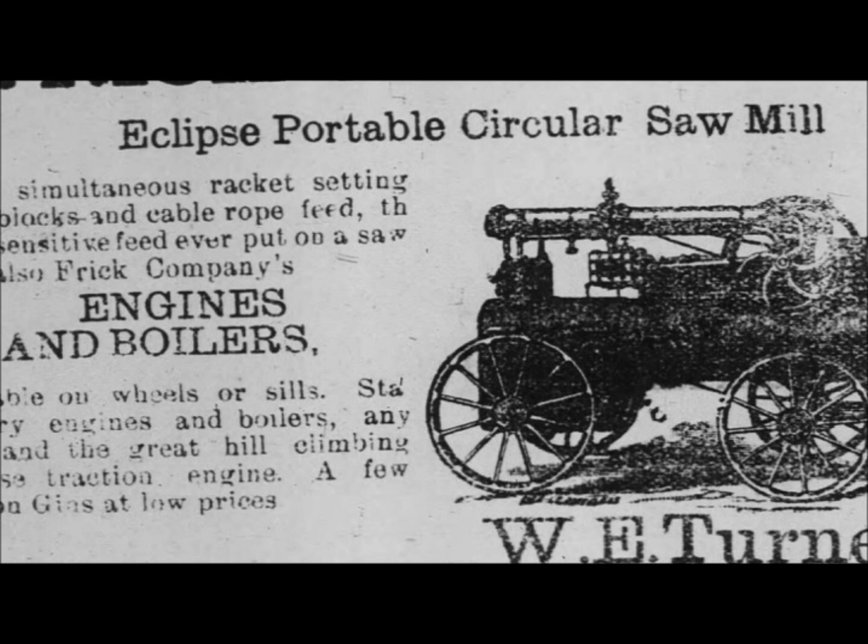His son, after Charles Turner came back from the Spanish-American War, went to work for J.C. Steele's company here in Statesville. He learned how to be a machinist from his father, who learned from his father. He said he also learned a lot from J.C. Steele, from that company. And when he decided to start his own machine shop, the veterans that served with him in the war invested with him to help him get started.

And again, that's talking about the Turner sugarcane evaporators, one of the main machines they were selling. This is 1908 in the Landmark, showing the machine shop after he's relocated down near the depot, near the railroad tracks in Statesville.

This was made by a man named Tobias Ellis, who was from Alexander County. He was a professional photographer.

In 1914, Statesville had an early form of a Chamber of Commerce called the Commercial Club, and they put out two books featuring photographs about Statesville and Iredell County. Ellis did the photography for him, took the photographs, and so this photograph is around 1914.

Now 1905 is when Turner Manufacturing cited that date as the beginning of Turner Manufacturing. So when their equipment would come out for years, it would have 1905 on it somewhere, saying that was when it first began, and that's when Turner started his machine shop.

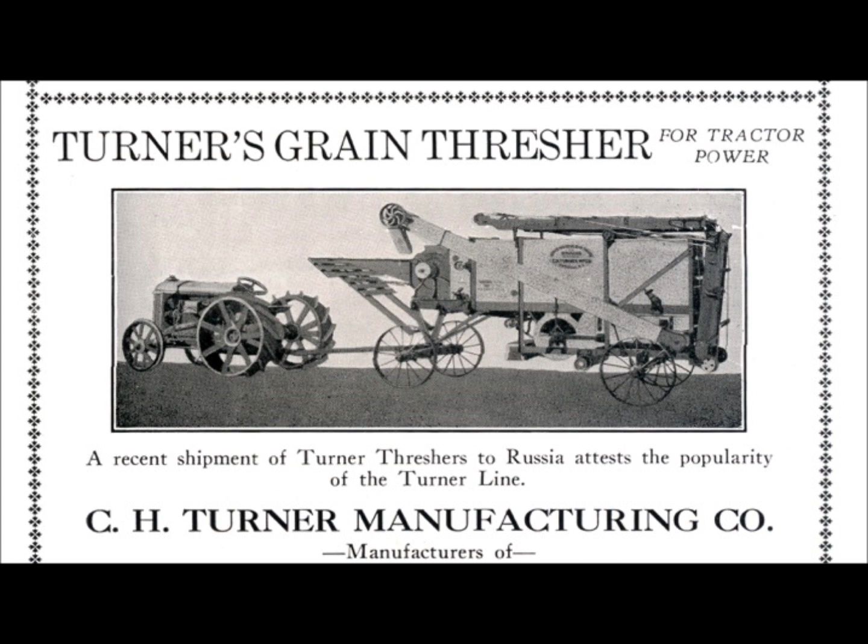And you can see here again, well, this is a later slide, but what happens is in 1928, Henry Ford stops making the Fordson tractor. So here is poor Charles Turner with his entire plant set up to make equipment to go with a Fordson tractor, and now they're not going to make it anymore.

That same year, his father, W.E. Turner, passes away. Then in 1929, the following year, October 24th, 1929, is the stock market crash and the Great Depression begins. So by 1930, he is forced into what is called a receivership. Back then, it's sort of like Chapter 11 bankruptcy now. He had to seek the court's protection while he reorganized his company.

And he does that successfully. By 1934, the paper is talking about how the company is once again going full throttle and doing well. In 1930, he was employing up to 165 people in Statesville in his plants, and that's a lot of people, a lot of workers even for a plant today.

This is from 1941, and this shows a listing of his equipment that he's selling and also the prices that he's selling.

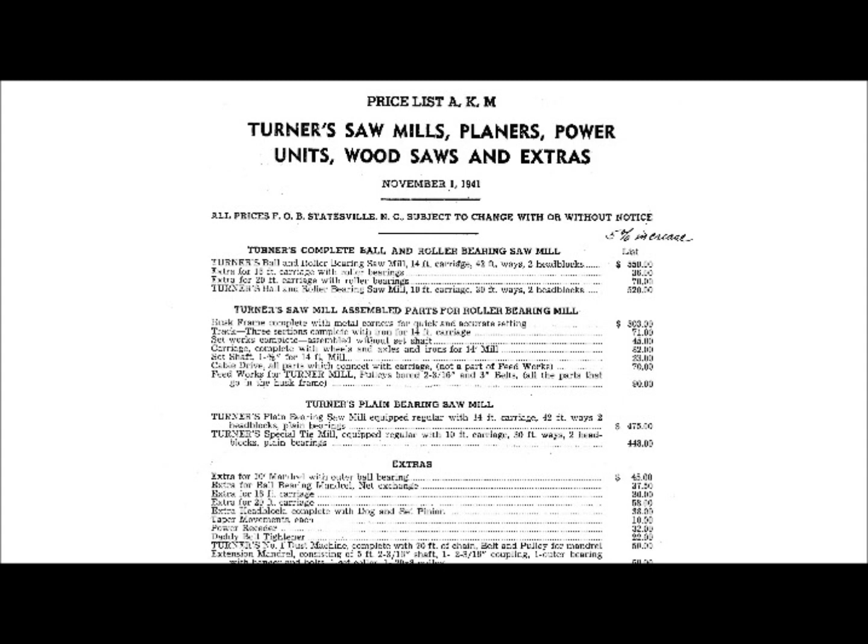Of course, Turner didn't have any heirs, so the company after 1941 falls out of the Turner family name. It's no longer owned by Turners. At this point, Jack M. Wagner is now running the company by 1946.

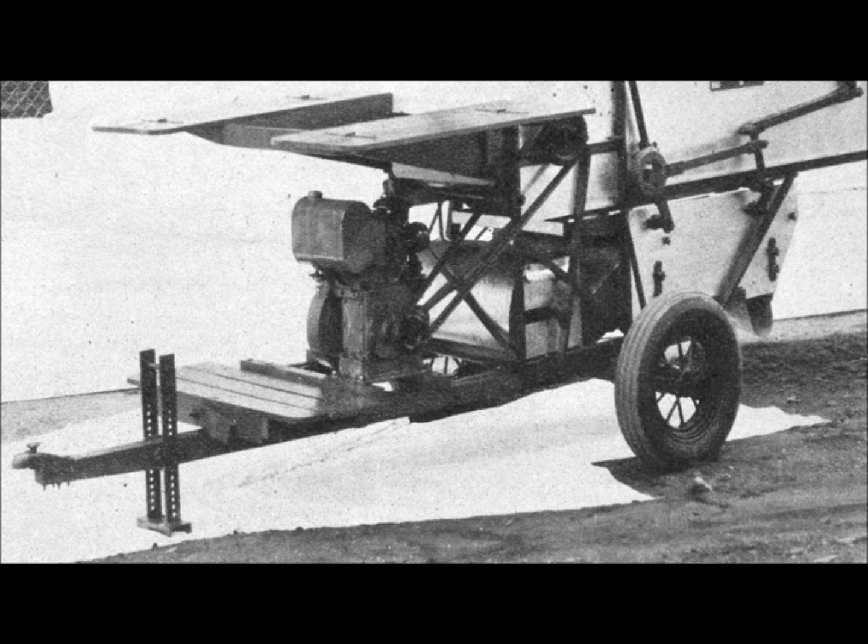And then here in '48, Turner is building an additional plant on Salisbury Road. So the company is doing very well.

The other one was the Imperial Knife Company. They made the blades and sharpened them, while the handle and the rest of the bayonet was made by Turner. They made and sent out thousands of these. You can see they manufactured 298,691 bayonets for the United States military.

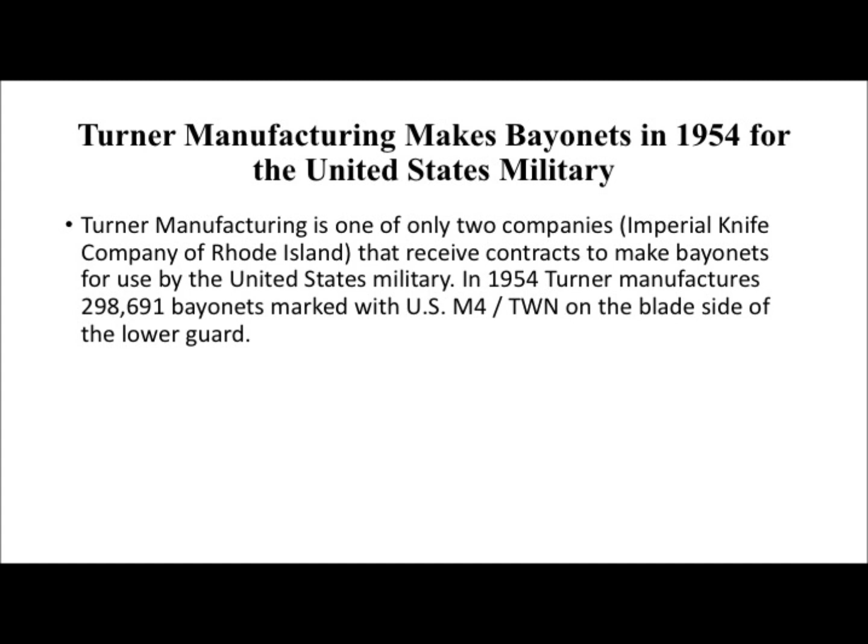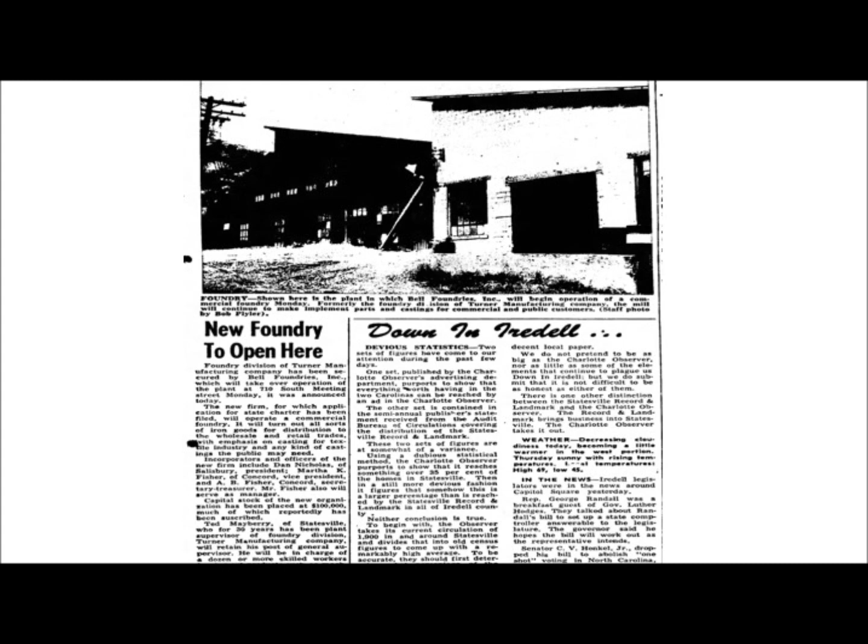In 1955, they have a foundry that C.H. Turner had created. In 1926, he incorporated his company into a corporation, combining the foundry with Turner Manufacturing, so it was all one company. But here in '55, they're selling the foundry to Bell Foundries, and this shows Bell Foundries advertising after taking over the foundry in '55.

In '55, Jack Wagner leaves the company to take over another company, the Tri-State Distributor Incorporation. Then the company goes through a reorganization again, and Turner A. Duncan is the president at this time.

They're pretty confident, and this is really interesting to those of us researching it, because they're going really strong in 1955. They buy the Earthmaster tractor, manufactured in Los Angeles, California. They're moving ahead, bringing the tractors to Statesville.

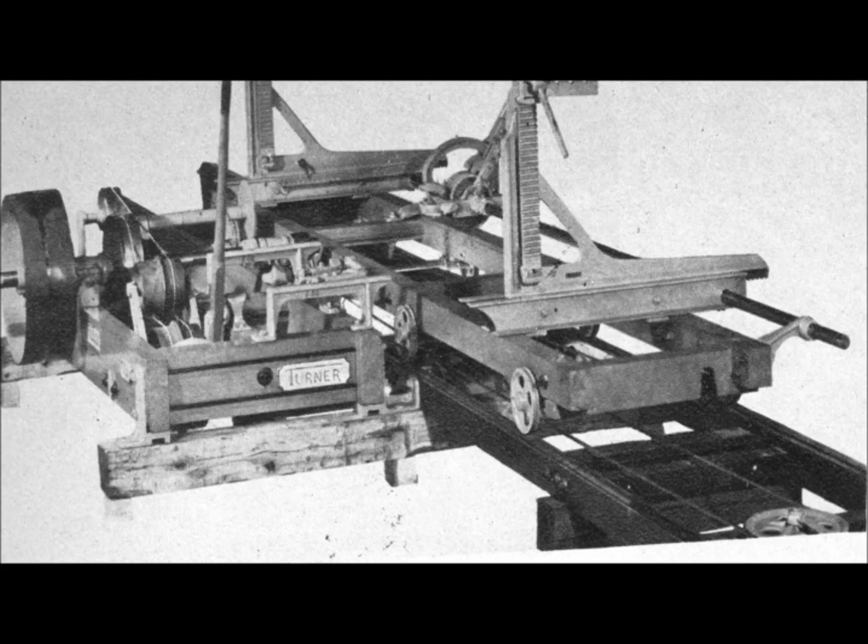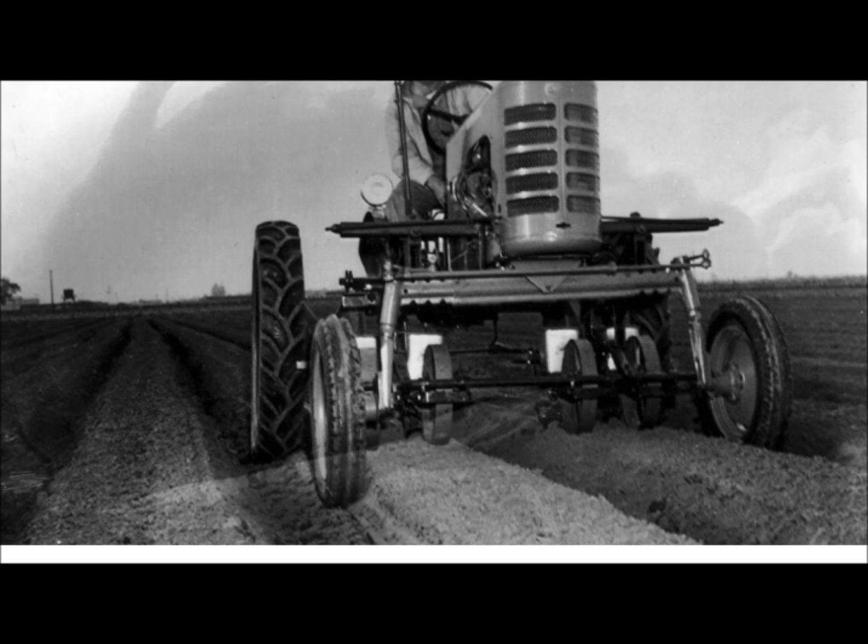Here you see another piece of equipment they're selling, an Earthmaster tractor. They looked at their market as basically the small farm, small acreage farm, and people who did a lot of yard work that would need a tractor. It was designed to be a smaller tractor for a smaller acreage farm.

And there were some beautiful Earthmaster tractors just right outside.

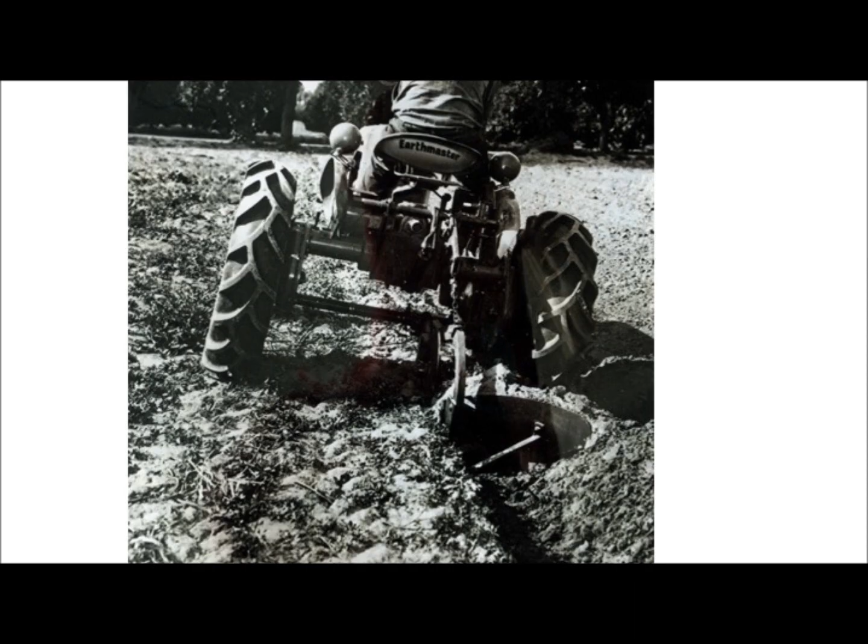Then the company decides to hold a parade in 1955, around December—of course, that's when they do the Christmas parade and the town's decorated. They decided to do a parade of their farm equipment in downtown Statesville.

Here you see an Earthmaster tractor being driven. I believe this is the gentleman who is here tonight—yeah, that drove that tractor in 1955, and he's here tonight. So it must not have rode too rough.

And here is another picture of them. These were taken by Max Tharp for the newspaper here, the Landmark.

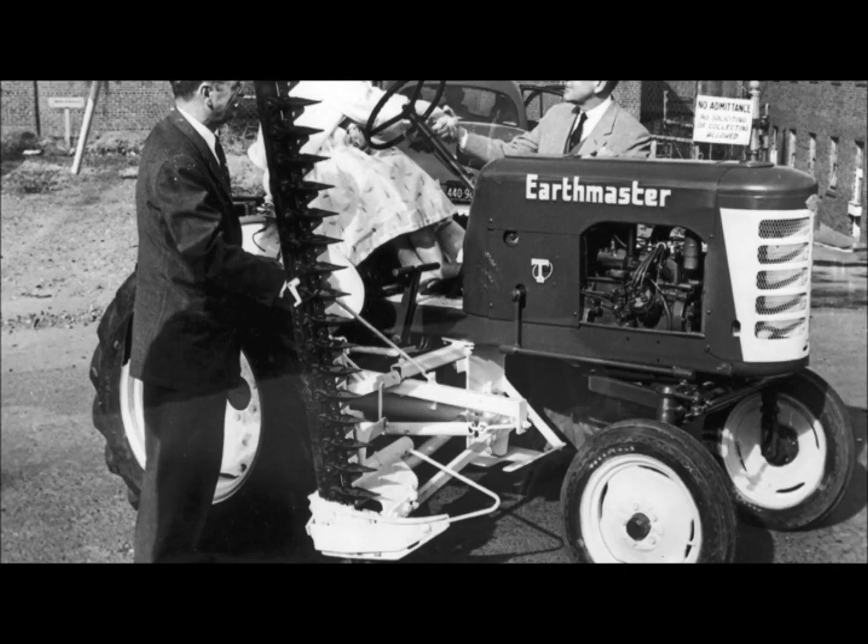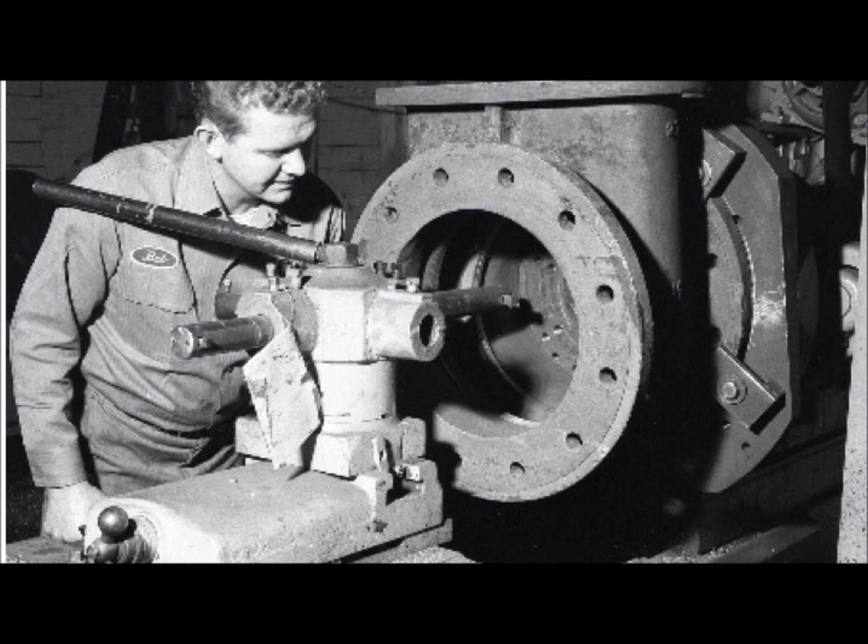They had a lady named Lillian Head who worked in the bayonet department, and they made her the Christmas party queen, so they had her dressed up as a queen to be at the parade for them, and that shows her with the executives.

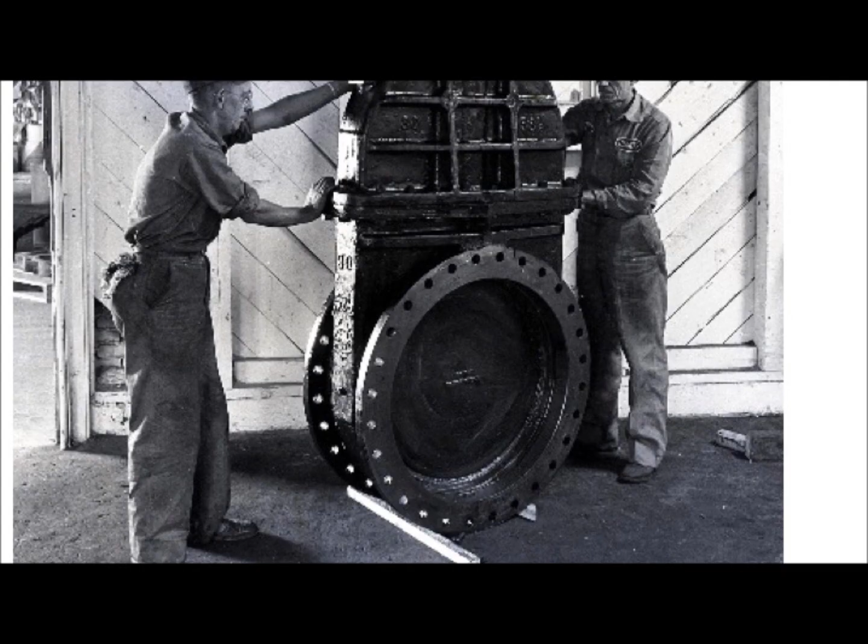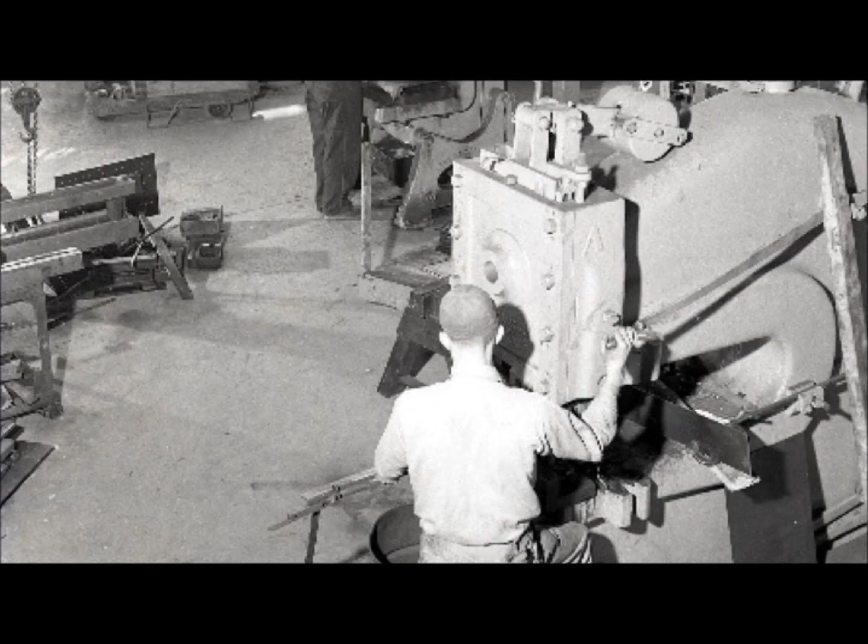But then all of a sudden, the company does a complete turnaround. Something happened between '55 and '56. At one point they're having a parade downtown showing how great they're doing, and then suddenly in '56, by September, they are basically going out of business.

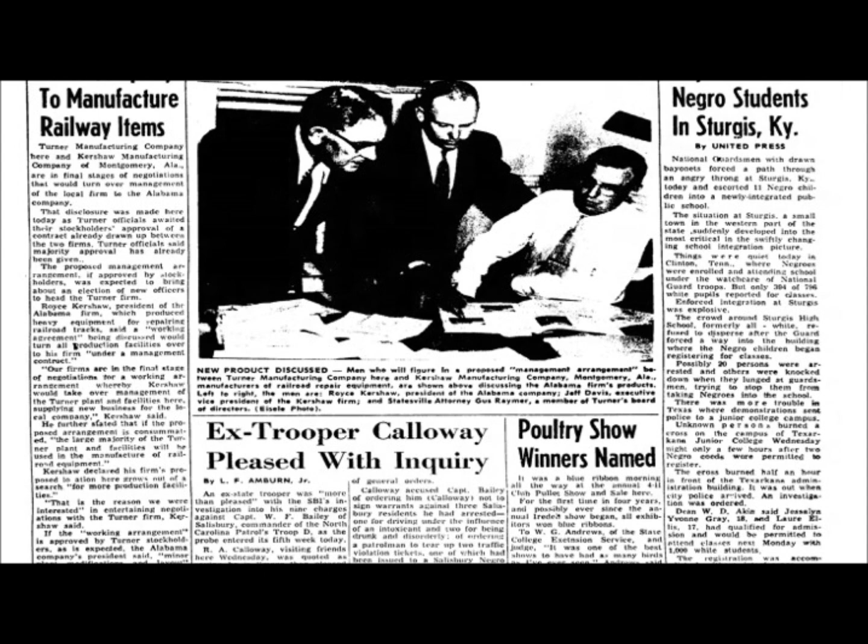They're switching over—another company has come in and taken over, a company that makes equipment for the railroad industry. This shows November 1956, talking about the company officers in charge. It's now owned by Kershaw Manufacturing Company, which deals exclusively with railroad companies, making equipment to repair trains and railroad tracks.

So they are suddenly just getting out of the agriculture business they'd been in since 1905—what they were doing well with, just a year and a half earlier.

And then in '58, Bell Foundries, whom they had tried to sell the Turner Foundry to, files a lawsuit against them for $30,000. And the next thing you see is April 29th, 1958.

One of their plants is now being auctioned off—the plant on Y Street is auctioned off, and the North Carolina Furniture Corporation buys it. So if you're getting sued and now they're auctioning off your materials, something bad has happened all of a sudden.

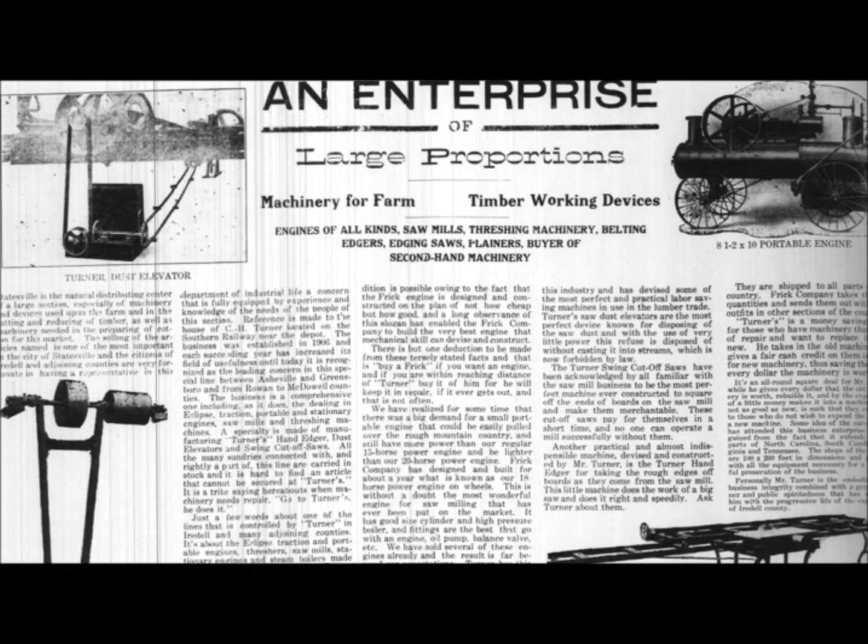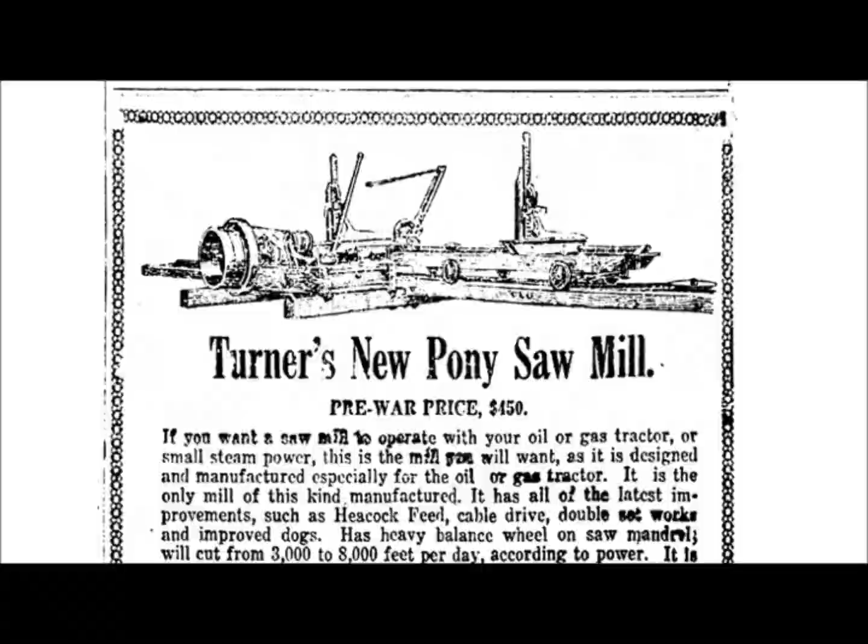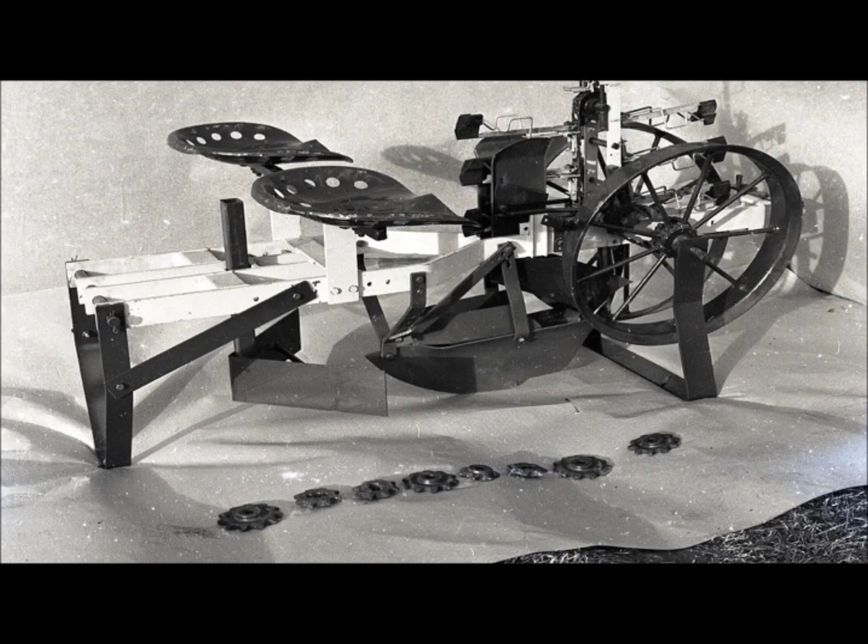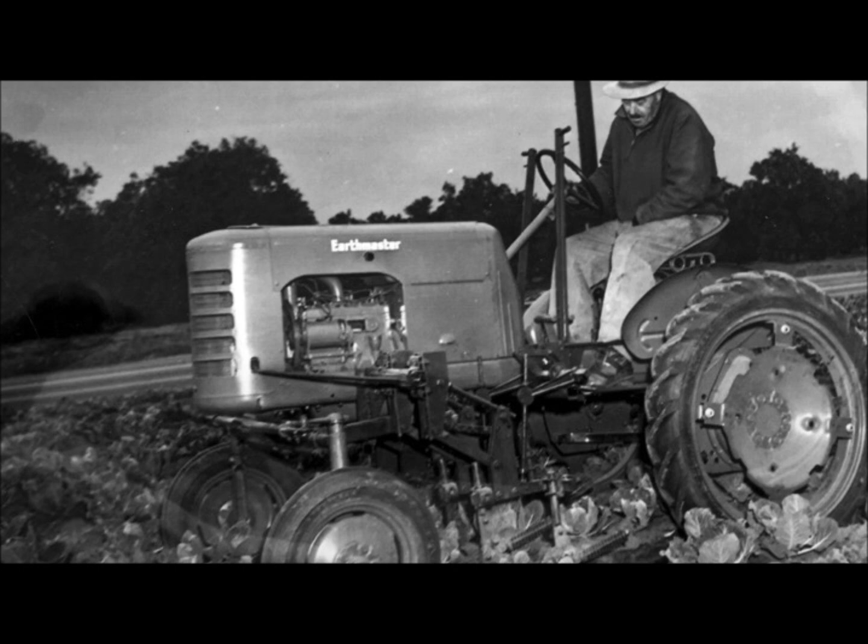He said what did them in was they hired an engineer in 55 - this is his story - and I do find where the company's engineering department was taken over by a new employee. He said they changed some of the equipment, the way it was made, set up a line to manufacture and sell it, and within about 6 months all of it was breaking down. They were getting calls from farmers in Georgia, Alabama, and everywhere saying 'I just bought this, it's less than 6 months old and it's already tore up.' The plant manager sent a crew down with tools to fix it, but they came back and said they couldn't - all of them had to come back and be redone completely. That was his story as to what caused the company to basically collapse.

Is there any questions or anything that's unclear?